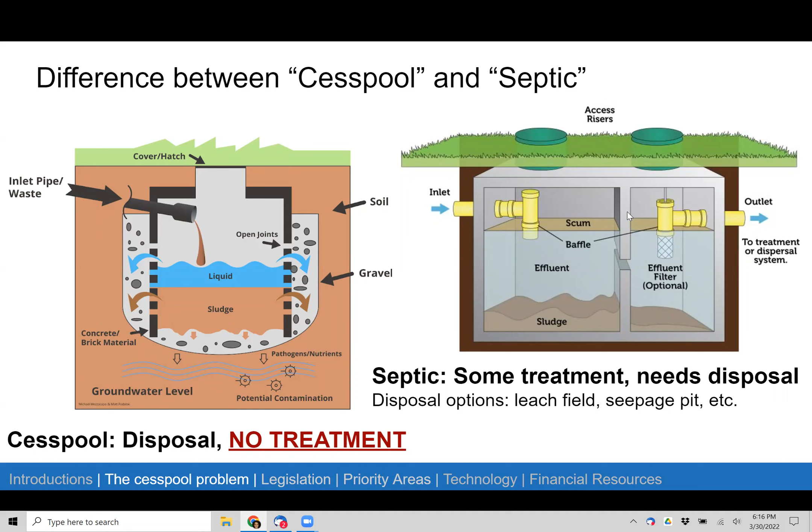And the microbes in the soil help break down all the pathogens. They don't take care of the nutrients, but we'll talk a little bit more about that later. And then just to give you a brief history of why we're here,

there's kind of the history of our legislative work at the Capitol that started actually before 2015, but we passed Act 120, which banned the construction of new cesspools. We were the last state to do that by several decades. And then in 2017, we passed Act 125, which mandated the upgrade of all cesspools by 2050, and DOH produced a prioritization report about the areas that were most impacted.

And finally, we passed Act 132 in 2018. That was the creation of the Cesspool Conversion Working Group. And I serve on that with about 17 other folks from different backgrounds. And now we're working on cesspool conversion bills to provide assistance and grants for low-income homeowners, and a couple other bills. So I'll pass it on to Christina.

Thanks, Stuart. So now I'm going to go over a little bit about the cesspool conversion priority areas. These are defined by the Hawaii Department of Health in 2017. And there are three main priority areas that are currently established, which are priority 1, which are areas of significant risk. These are regions that had documented impacts to drinking water or to the ecosystem at the time that these

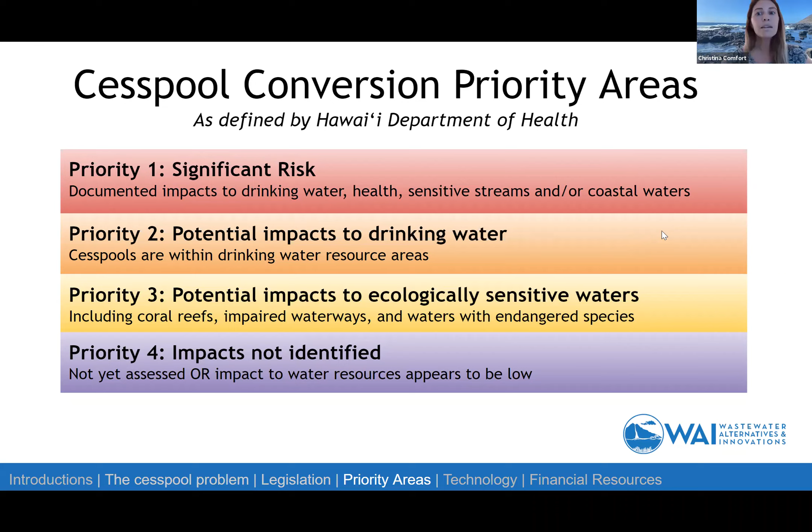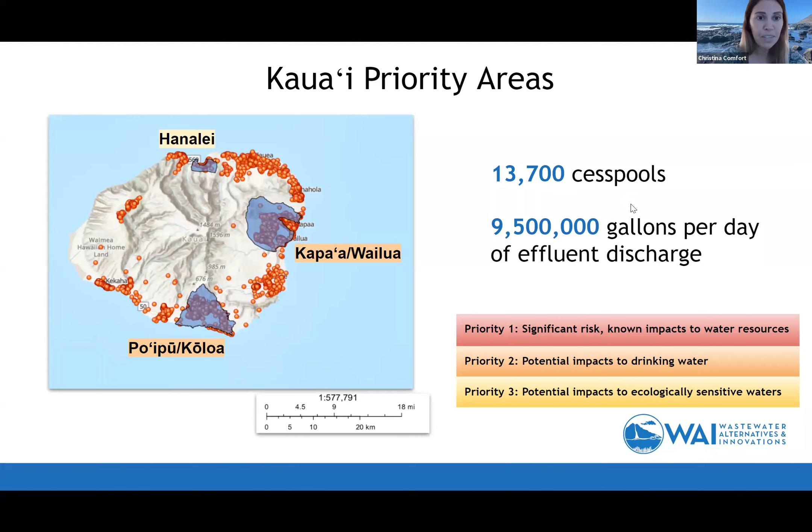So on Kauai, there are about 13,700 cesspools. And those cesspools discharge an estimated 9.5 million gallons per day of effluent into the ground. Much of that effluent reaches the groundwater and surface waters and the coastal ocean, causing a range of environmental problems, also human health problems.

And we're looking at priority level 2 for this area, for the Poipu Koloa area of Kauai. That means that there's a risk to drinking water, but as you'll see in our next few slides, we also believe there's a risk to the ecosystem here. There are 3,600 cesspools in this region, discharging about 2.6 million gallons per day.

So you can see this blue shaded area on the map is the boundaries of the DOH defined priority area, and each red dot is a cesspool. So you can see the areas where they're really high density compared to areas where there's not any cesspools.

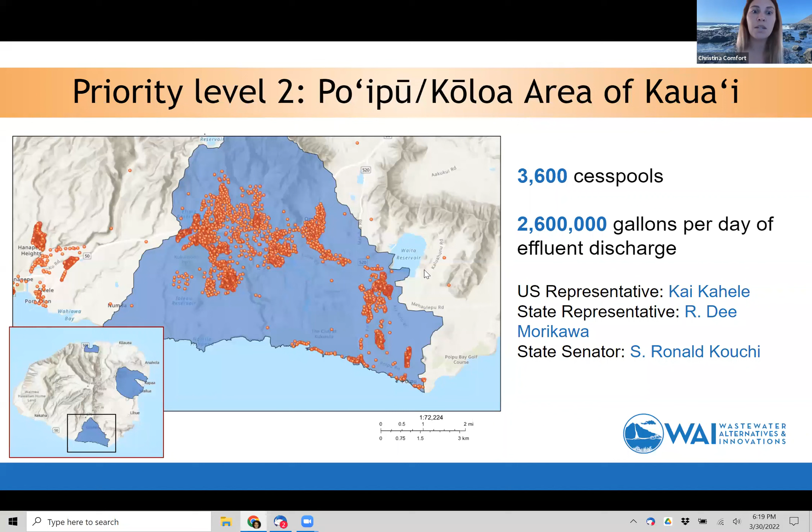Briefly, I'm just going to go over the health and environmental risks that are associated with wastewater pollution from the cesspools. On the public health side, if you get cesspool pollution into your drinking water, there are a couple different things that can happen. It's possible to encounter pathogens in your drinking water, and it's also possible that elevated nutrient levels, specifically nitrate, in your drinking water can be linked to an increased cancer risk for certain types of cancer, such as bladder cancer. There's also the risk of encountering pathogens in the environment.

So when this pollution reaches the coastal ocean, if you go swimming with a cut or if you swallow some water, it's possible to get sick from that, either a skin infection or gastrointestinal infection or different types of infections in your eyes and ears. And many of you probably know somebody or yourself have gotten infections from dirty water.

On the environmental side, these nutrients that come from cesspool pollution can leach into the reef and cause invasive algae to overgrow corals. So this is really bad for our coral reef ecosystems. It makes the corals less competitive, and invasive algae, like shown in this picture, can overgrow the whole ecosystem, which does a lot of damage to fish populations, and also it leads to things like the tumors that you see on Honu. Sewage pollution can also lead to increased rates of coral disease and reduced coral cover overall.

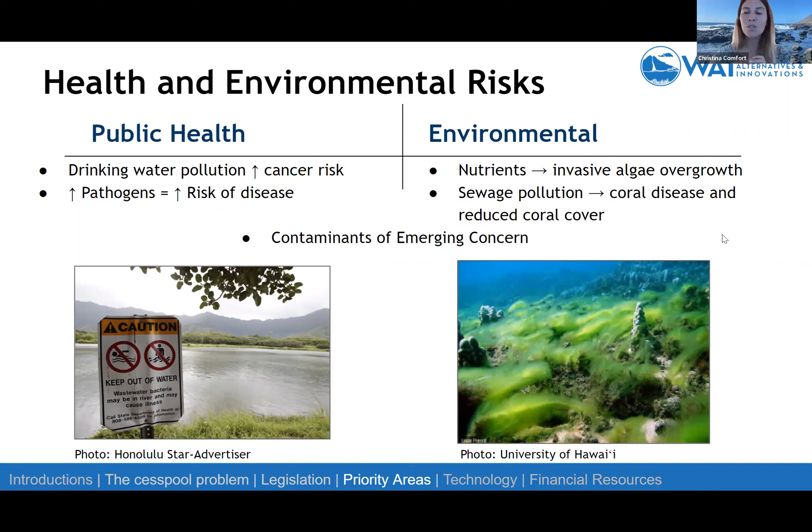And I just want to give a short shout out to the Department of Land and Natural Resources Division of Aquatic Resources, who are heading up the Holomua 30 by 30 program. So this is an initiative that is aiming to protect or manage 30% of the coastlines by 2030. And their initiative has 4 pillars: place-based planning, Pono practices, monitoring, and protection and restoration.

And DAR really acknowledges that it's not just fishing impacts on the reef, that there's also land-based impacts on the reef. So we're partnering with DAR and helping to bring in some of these land-based impacts into the equation and making sure that when we're working on monitoring, when we're working on protection and restoration, both the fishing impacts and the land-based pollution impacts are taken into account.

And from here, I'm going to pass it over. Oh, sorry, I have one more slide.

This is a slide showing some water quality data for Kauai, and specifically there's a data point for Poipu Koloa that I wanted to share. These are some data from University of Hawaii scientists. It's the Celia Smith lab, and they have used algae tissue that they take from the reefs, and they're able to determine the sources of nutrients from looking at the isotopes in this algae tissue.

So basically what that means is that wastewater has a distinct nutrient signature, and the algae show that signature when you analyze it. So you can see here the squares. There were samples taken down in the Poipu Koloa region, and those samples came back in the red range, which means that the nutrient input in that region is dominated by wastewater.

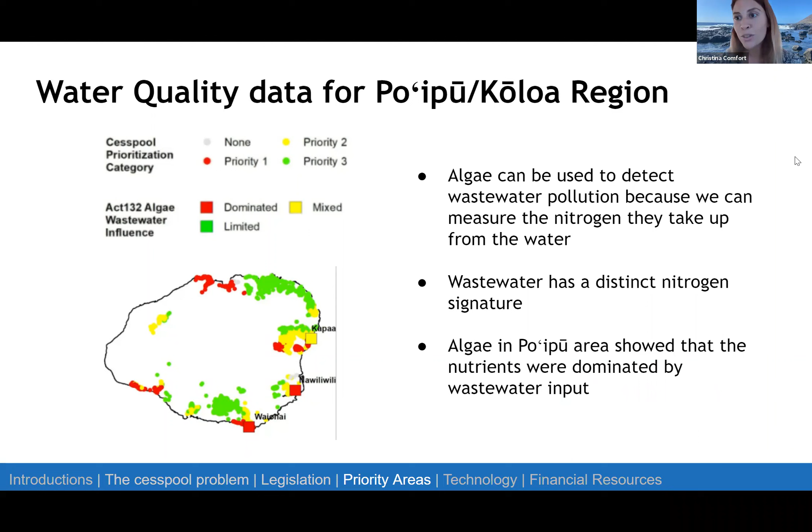Surfrider has been sampling every single month out there since 2012, 10 years. The yellow line is the average; the bacteria levels, which in this case are going up to about 20,000, should in fact be below that yellow line on average. Any single sample should be below that red line, or 130.

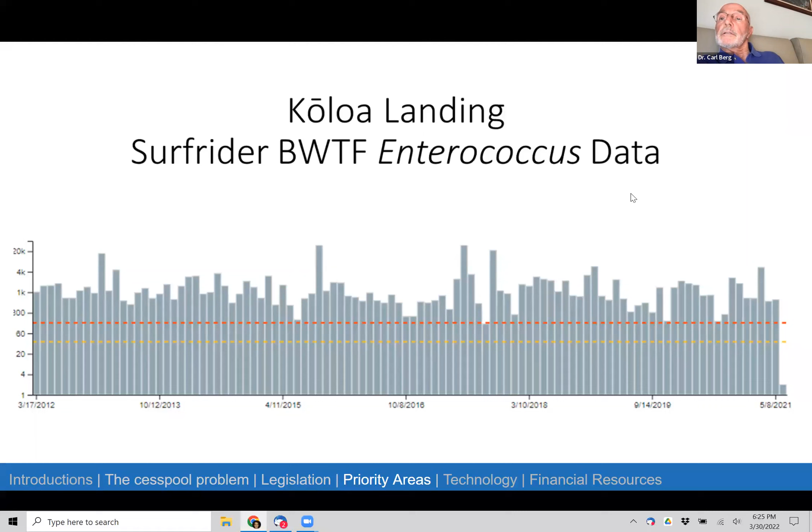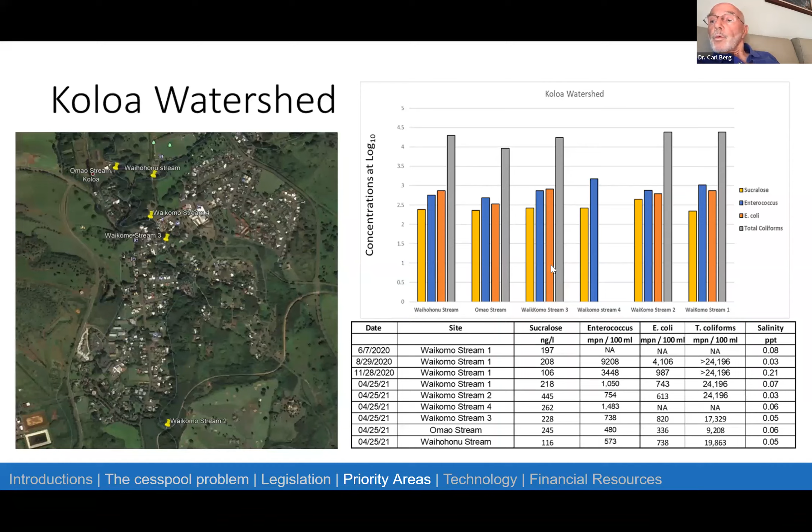And they may have clean water when they're outside diving, but then they come back in and coat themselves with highly polluted water. So we've been advocating fruitlessly to have the Department of Health do something about it, put warning signs up, but this is where WAI comes in. We got to clean it up. Next, go ahead.

Carl, we want to thank you so much, you and the Surfrider Foundation, for all the work you did. You have an extensive record over the last 10 years, and we really appreciate that, because it helps supplement what the Department of Health is doing and gives us a lot more in-depth information in those areas. So mahalo. I'll pass it to Yoko.

Thank you. Yes, so what can we do about these problems now that we know what caused them? Well, we deal with the cesspools and we replace them with something better. And so we're going to go through a number of technical solutions on different scales and see what are most feasible for the Poipu Koloa area.

We can start with something that most people should be familiar with, which is county sewer, also called municipal sewer, which is basically the county installing a large-scale centralized treatment plant and then pipes from every house pumping their wastewater there. You can see Kauai currently has 4 municipal sewer treatment plants, and the closest one is pretty far away. So it's not really a feasible solution for Poipu Koloa.

In addition to that, traditional gravity sewer, which is what municipal sewer usually is, is very expensive to construct, very invasive. It takes a lot of construction. It has to go under the road, so the road has to be busted open, traffic issues, all kinds. And then infiltration issues also when the groundwater enters through cracks in the pipe, and it leads to a monthly sewer bill for homeowners. So we can do better than that. So let's see what else is around.

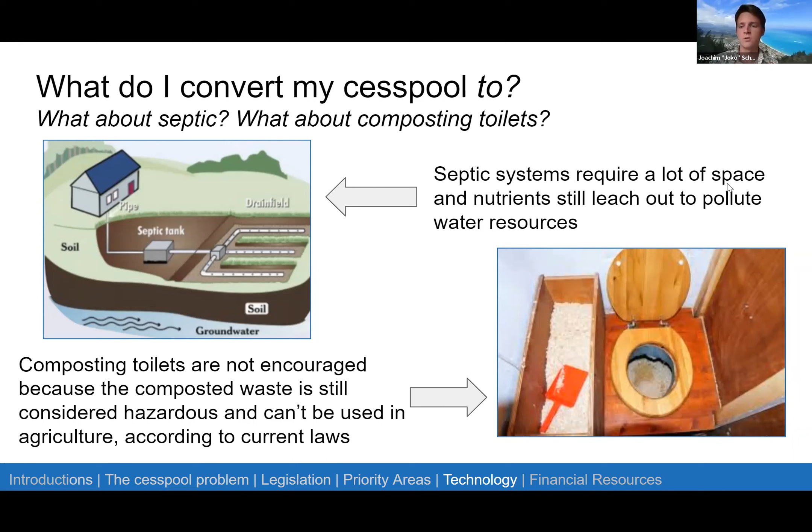And then composting toilets, many people ask us about composting toilets. They work for some people that are willing and able to put in the extensive maintenance and operation that goes into those. But for most people, they're not encouraged because the composted waste is still raw, untreated human sewage, and that cannot be used in agriculture, cannot be used as fertilizer, and people are still handling raw sewage manually. So it's not quite ideal. So let's see what else is out there.

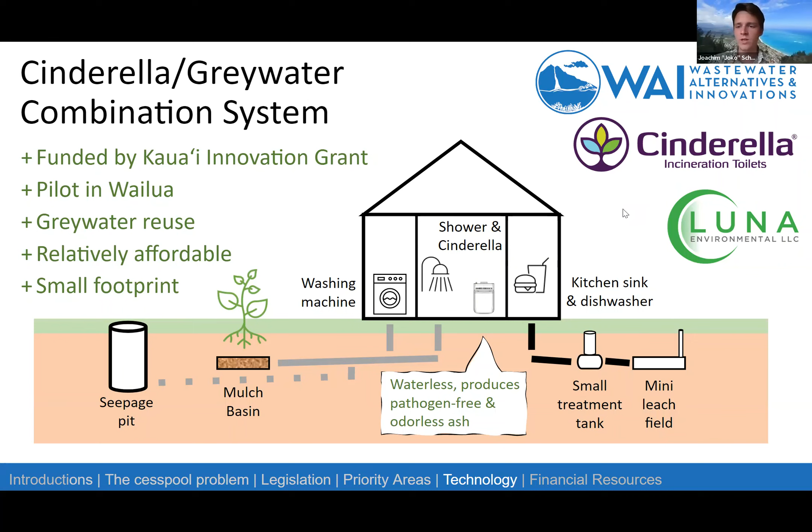And we partner with a company locally that's called Luna Environmental. And we're excited to announce that we are in the finishing touches of a pilot system that uses these toilets together with a gray water system and a kitchen black water system in Wailua Homesteads. And you'll hear much more about it very soon when we're allowed and able to show it off. Basically, this eliminates a cesspool and it's much cheaper, with a smaller footprint than a septic system. And yeah, this is a pilot that will be tested and hopefully will be all over the islands very soon.

Then we partner with a local small startup company called WaiHome that makes a pilot using algae. And you can see it looks kind of like a solar panel that mounts onto a septic tank. And this provides additional treatment to an existing septic tank. Really exciting, but still very early stage, and you'll hear much more about it pretty soon as well.

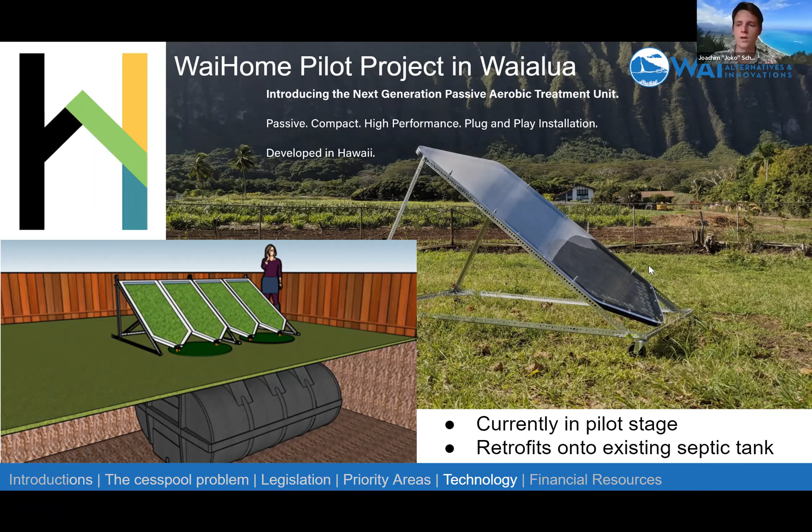Now getting to more established solutions that are also very good alternatives to septic. We call them enhanced septic systems because they're a similar concept, but much better treatment, especially nitrogen removal. So going left, we have a biofilter that is essentially a septic tank and a leach field, but the leach field has a wood chip layer beneath it that allows for special bacteria called anaerobic bacteria to live and take the nitrogen out before the water goes into the soil.

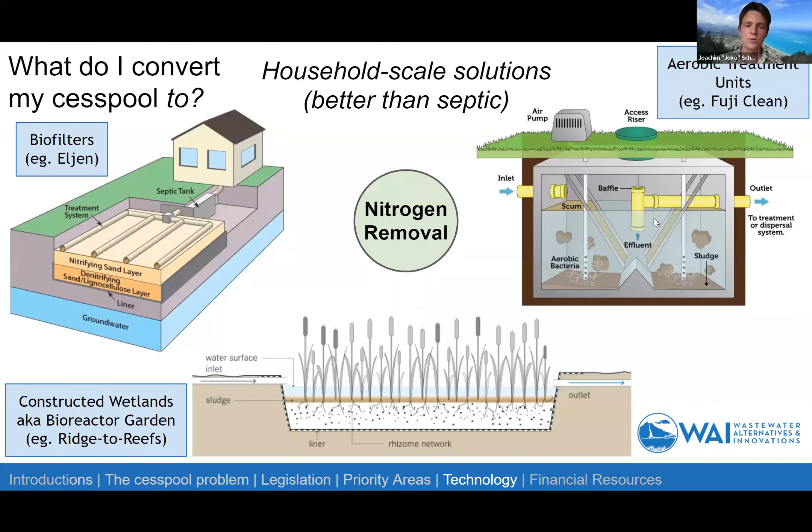On the bottom, we have a constructed wetland also called Bioreactor Garden, which we're partnered with a nonprofit called Ridge-to-Reefs. They're actually here with us today on the call, and you'll hear much more in a second. And aerobic treatment units in the top right are not a nature-based solution. They're a mechanical solution. They use electricity, very small footprint, and they also produce high-quality effluent that can then go to a leach field. And we'll kick it over to Paul and Fal from Ridge.

Hi, I'm Paul Sturm. I'm the Executive Director of Ridge-to-Reefs, and I'll just give a little background on our organization. We work across the Pacific and the Caribbean, as well as the mainland US. But historically, we've done a lot of work on islands, in particular, working on watersheds and watershed issues, pollution issues. And we kind of waded into this issue of wastewater treatment, particularly nature-based wastewater treatment, because we saw this being an issue across every island that we've ever worked, including the Hawaiian Islands, American Samoa, Palau, Puerto Rico.

And so we have a team that's composed of engineers, biologists, agronomists, and some of our staff particular to this project are shown here. And we have staff in a number of Pacific areas and countries, as well as Puerto Rico. And so one of the things we did is work with WAI to get a USDA technical assistance and training grant. And through that, we're working with them to convene local stakeholders and wastewater professionals. And this meeting is part of that project. The other aspect of the project will be technical training to folks involved in the wastewater industry, specific to nature-based wastewater solutions.

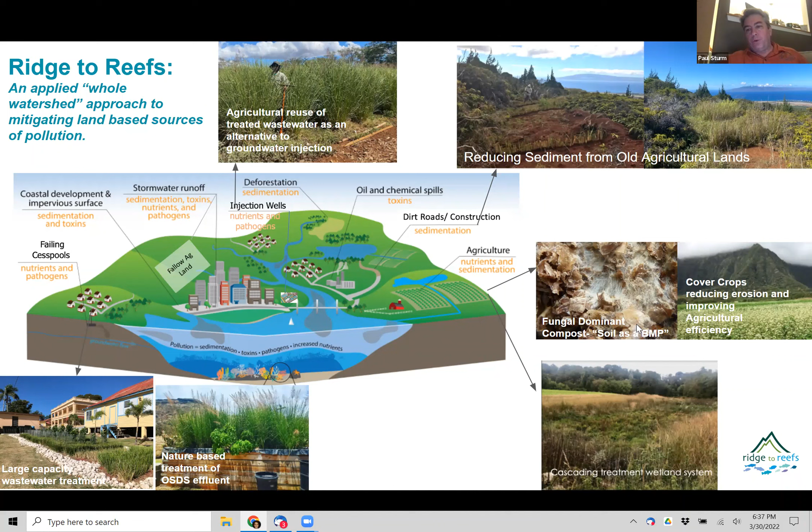And just a couple other pictures of a large capacity wastewater treatment system that we built, again nature-based, in the bottom left corner in Puerto Rico. And then you can see to the right there is what we call our bioreactor garden. And we worked with University of Hawaii and WAI to test that system at the East Honolulu treatment plant. And so it's worked very well. You can see some of the other types of projects we do, working with farms and really trying to improve soil to reduce runoff and reduce contamination. Next slide.

So with this technical and training grant, I just want to show you all where we are on this grant. Again, we're focusing on 5 high priority cesspool areas, and 3 of them are in Kauai. One is in Maui, and 1 is on Big Island.

And again, I think part of it is an educational process with homeowners and stakeholders. And then part of it is more technical training with folks that are more involved in the processing of wastewater and more involved on the technical side of addressing these issues.

And so one of the next things we have coming up is this summer we'll have a training in Poipu and Koloa that will be associated with WAI and talking more about nature-based solutions and how they can be integrated into these systems, and they're much lower cost and highly effective.

And we'll also be working on technical memos for each of the communities and trying to identify funding opportunities, and even write grants to help bring some funding to these 5 communities that cesspools are impacting significantly.

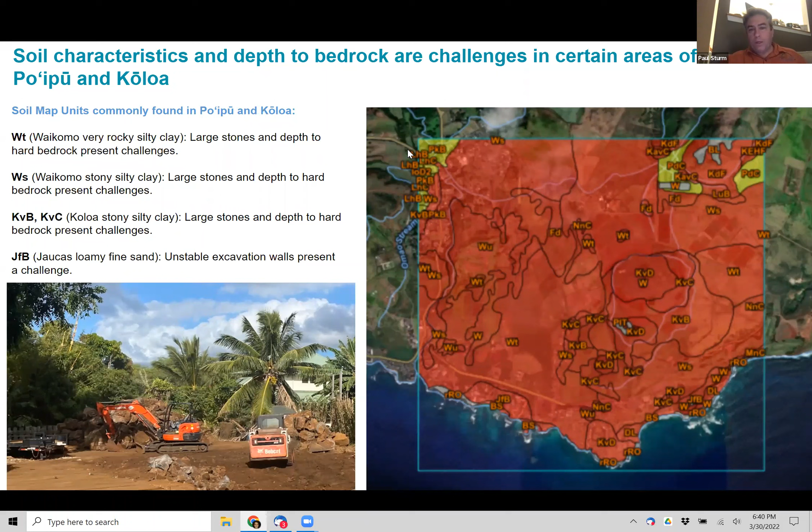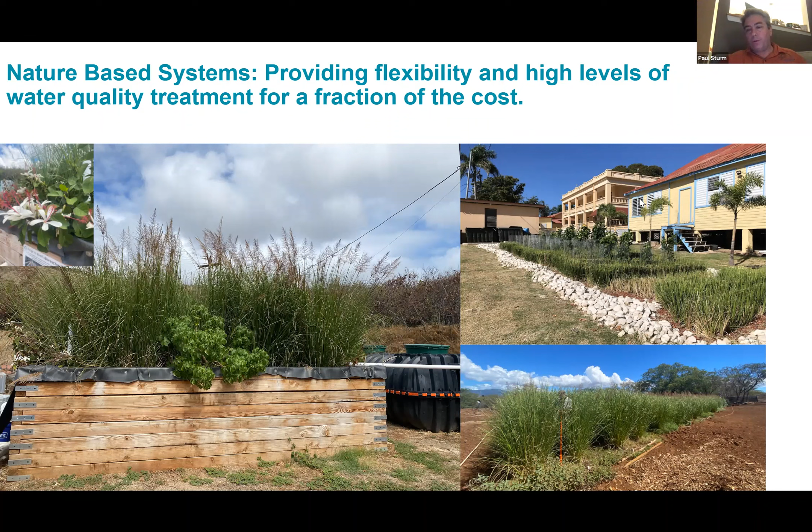The last picture on the bottom is where we're using vetiver grass and other species to uptake wastewater from the Kihei sewage treatment plant in a pilot project, as a way to dispose of that water and grow restoration crops rather than allow that to contaminate the groundwater and then make its way out to some of the beaches in Kihei. Next.

And real quickly, we're publishing some of this data right now with University of Hawaii and Dr. Roger Babcock. They're seeing 87% removal of total nitrogen, which is really high, greater than 80% removal of phosphorus, 96% removal of TSS. And we're also seeing a 15% to 20% volume reduction, because these plants are actually uptaking a lot of pollutants and reducing the volume of water.

And the whole reason we developed this is because it can be made from local materials. It doesn't have to be shipped in on barges and ships. It can be made from local materials, often seen as waste stream issues, where we can use wood chips, or even glass from recycled bottles. We can turn that into sand and have that be part of the filtration layer before the denitrification layer.

And there's no electricity required in these systems, so it's not adding an additional burden to the homeowner. And we looked at the numbers here, and it should be at least a $10,000 cost savings versus a traditional ATU unit, and higher performance from what we're seeing.

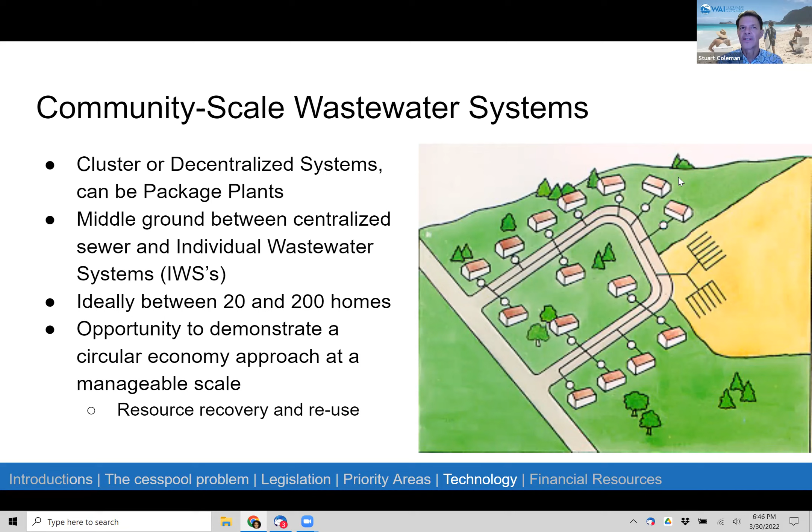It's a way to work on a local scale and practice a circular economy approach where we reuse the solids and the liquids, and we have a lot of resource recovery. So this is a glimpse of where we will be heading in the future. In order to do this, communities need to set up community sewer projects, and that can be done by a sewer improvement district or a community facilities district. You need either 50% of the homeowners signing on in a community, or the county council can vote on it and pass a bill to do it.

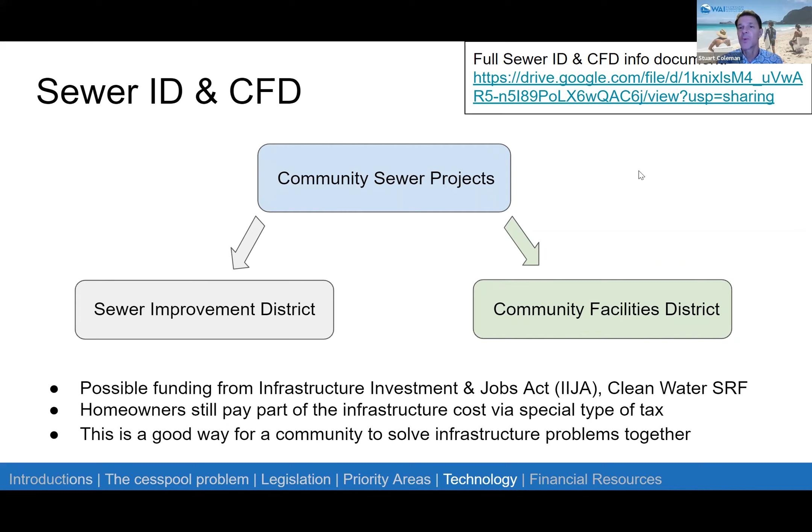This can bring in possible funding from the new Infrastructure Investment and Jobs Act, also known as the Bipartisan Infrastructure Law, and Clean Water State Revolving Funds. Homeowners will still pay part of the infrastructure cost via a special type of tax, but this is a really good way for a community to solve infrastructure problems together. And to remind everybody why it's so important, we have in the state a high level of 303(d) impaired bodies of water, and a lot of them are impaired due to sedimentation and wastewater inputs. So we're trying to get beyond that.

One of the companies that we feature is called Cambrian. We won a grant through Elemental Accelerator to help them set up a system in Hawaii. Their approach is unique because it's containerized, mobile, and stays above ground, so you don't need all the huge infrastructure work to go underground. It can be scaled up if a community expands. And the amazing thing is that it produces water suitable for recycling goals and for irrigation. It can go up to R1 water.

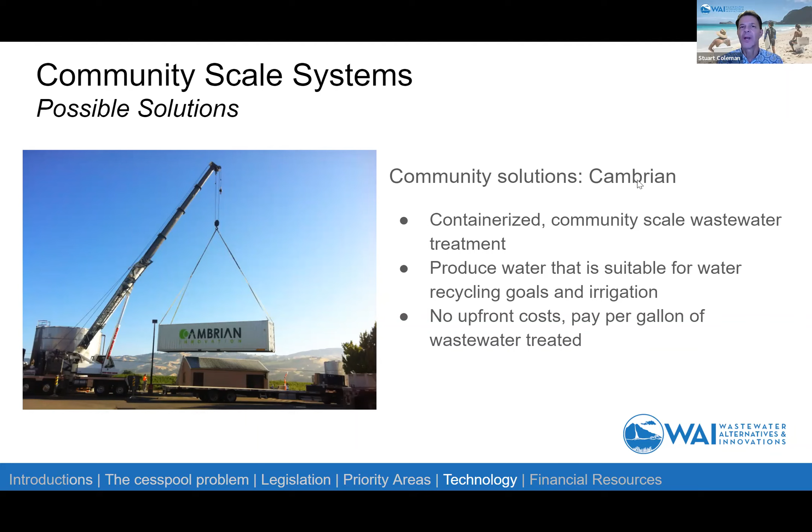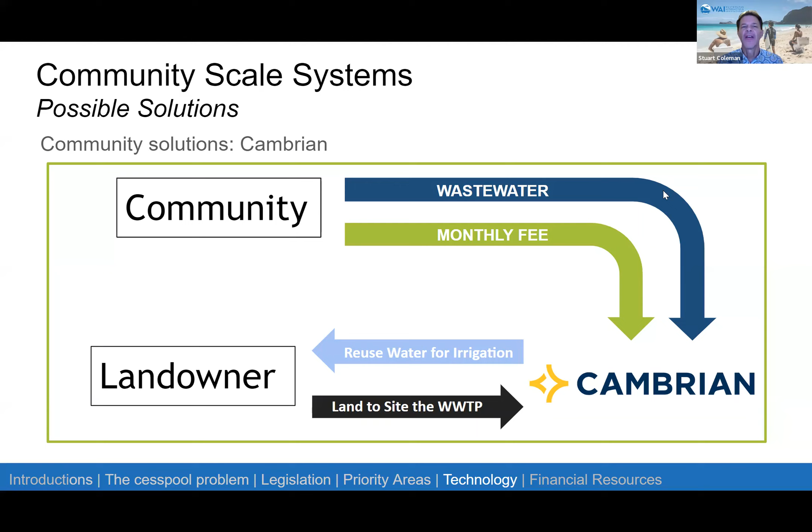There are no upfront costs, and they have a sanitation as a service model where people pay per gallon of wastewater treated. They take the water from a community, there's a monthly fee, and then they produce water for irrigation. If there's ag in the area, we can use that for those sites. And then the solids will go hopefully to another company that we work with called Biomass Controls.

I met these folks at the Gates Foundation, in that picture. This is in Beijing. They are similarly a container size omniprocessor, so it's mobile and scalable. We worked together at the Gates Foundation, and they can turn the solid waste into biochar.

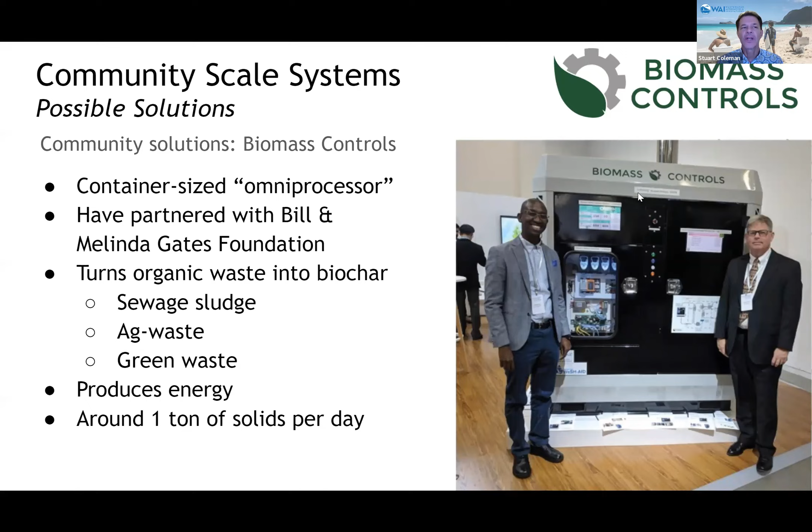And biochar is done through a process of pyrolysis, and it turns these solids, eliminates 100% of the pathogens, and 95% of PFAS, PFOS, pharmaceuticals and contaminants of emerging concern. And the great thing is you can use sludge and ag waste, green waste, to turn it into this biochar.

And you take the sludge, and through this process, you take the stuff that is literally odorless and 100% pathogen free. And you've probably heard of other biosolids companies, where they recycle it and they hope to use it as fertilizer. A lot of people don't like it because it still smells, it still has contaminants, it still has chemicals, pharmaceuticals, but this you can be sure, does not.

And that biochar can be used for water filtration. It's like activated carbon for air and water filtration, and you can use it for soil remediation. So really, it's been listed as one of the top 20 ways to reduce the effects of climate change.

If you think of all the wastewater treatment plants around the country, instead of trucking those solids to a landfill where they continue to emit greenhouse gases, and then you have the trucks burning fuel to get there, you could do this on site and use it for agricultural inputs. So it's a really exciting prospect for the future.

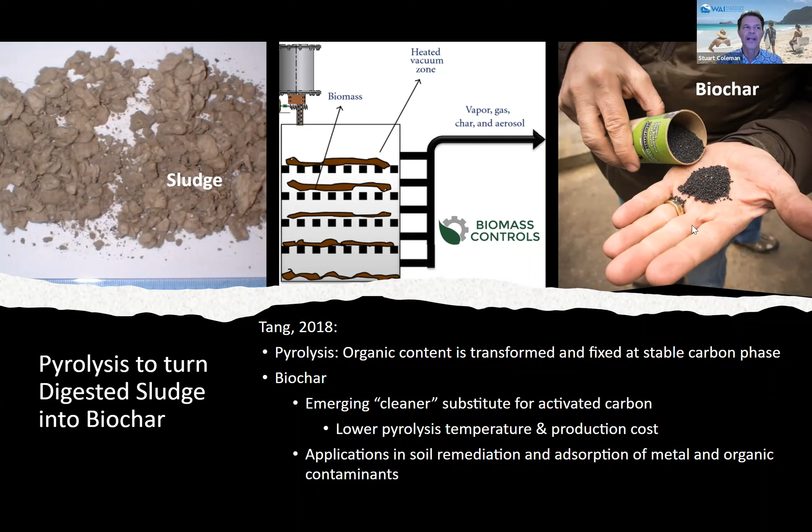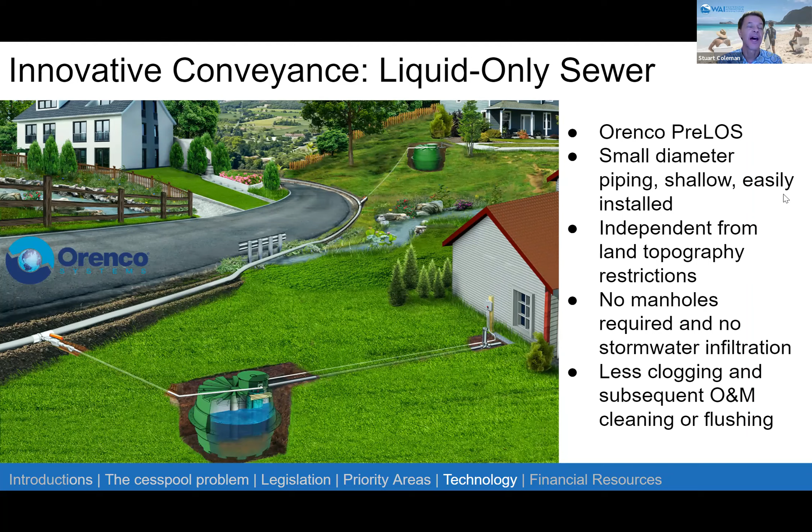So what we envision at WAI is this circular economy approach, where we reuse all of our solids and liquids. We use the liquids for irrigation, and we use the solids for soil remediation, as a carbon sink, for stormwater filtration, odor filtration, and this will help us meet our carbon neutrality goals, our goals for localized ag, and more sustainable agriculture across the state.

And Hawaii, as Senator Kouchi and Representative Tokioka said, has the highest number of cesspools in the country, and we were the last state to ban them by several decades. But we have the opportunity to make Hawaii a leader in the country by going from cesspools to these kinds of circular economy systems, or systems like Paul was describing that Ridge-to-Reef does, passive systems that reduce the nitrogen. Because up and down the East Coast, they're having to replace septic systems because of the nutrient pollution that created harmful algal blooms, cost millions and millions of dollars to clean up and can devastate tourism. So we're very excited about that model.

So switching to the financial aspects, we have grants and loans available through the USDA Rural Development Program, 502 and 504. We're going to send you this PowerPoint presentation, and if you could share it with your friends, that would be great, so we can tell you more information about these. It's been a little tricky because not a lot of people qualify because of higher incomes in Hawaii and higher real estate values.